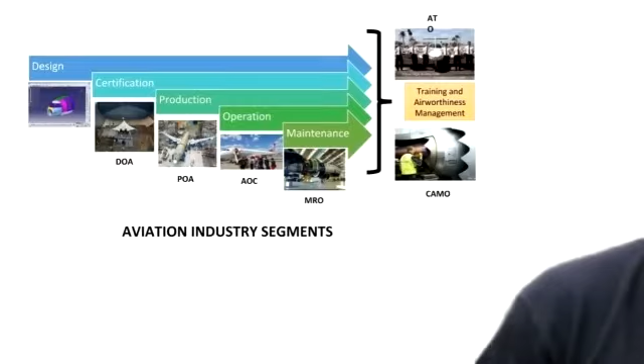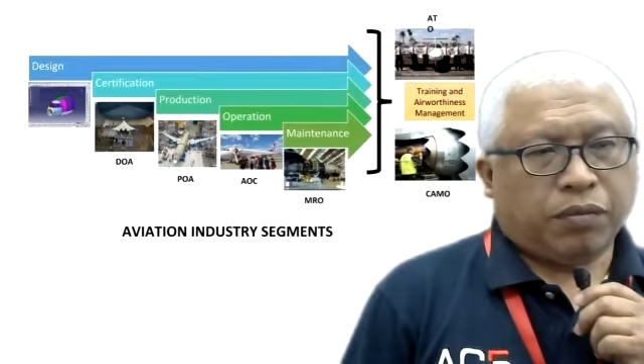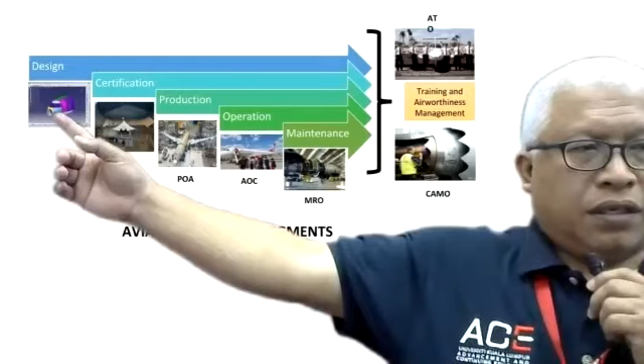Today I will talk about the aviation industry segment. What is the whole ecosystem of the aviation industry or aerospace industry? You can look from here, we begin from design certification, design certification of the aircraft component.

Those are the initial segment of the industry, which is design and certification. Some companies just do the design, they're not doing the certification. They may be doing just an initial product, or a once-off product. For example, Burt Rutan have designed and manufactured several aircraft, but they are not certified because those are special mission or experimental aircraft. So they're just doing the design.

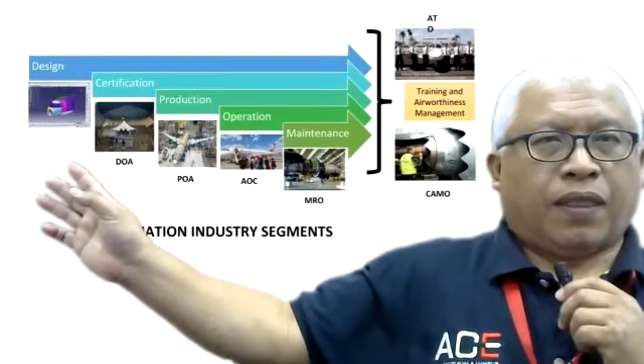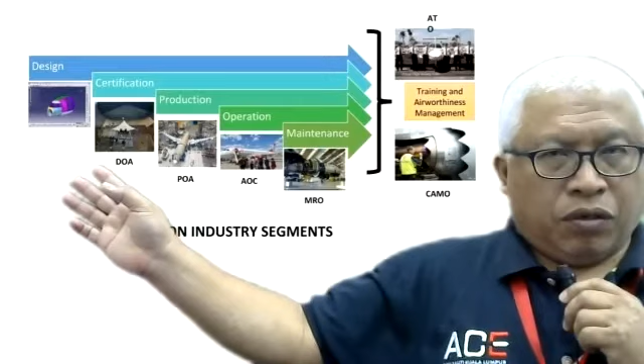Then if you have the design, you certify the design, for you to be able to get the type certificate. For the aircraft to be awarded with type certificate, they have to go for certification. In certification, the aircraft must comply with all the certification basis, which was agreed with the Civil Aviation Authority, the authority issuing the type certificate.

Why do we need the type certificate? Because the type certificate is a prerequisite for the certificate of airworthiness. For commercial hire and reward flight, the aircraft should have a valid certificate of airworthiness. Without that, the aircraft will not get the certificate of airworthiness. The best they may get is an experimental certificate, which is not for commercial or hire and reward.

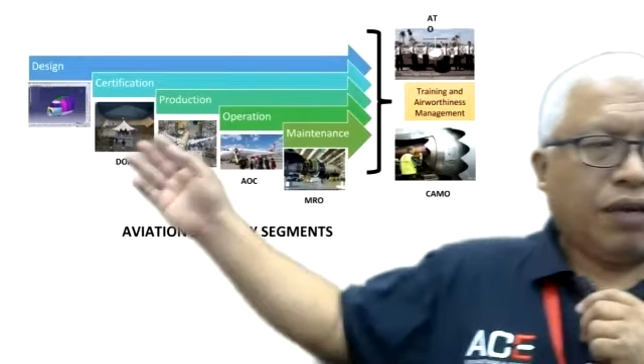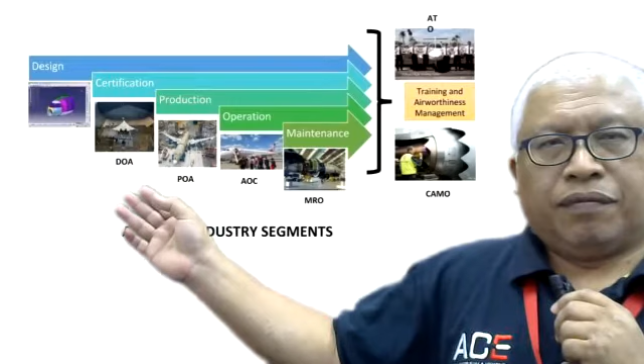Once you have the type certificate, you go for production. This means you have a certified product, and you already have the type design data, which is transferred to the production organization. They will make parts, components, and assemble the aircraft, engine, or propeller as one complete assembly. Once completed, you have a complete product.

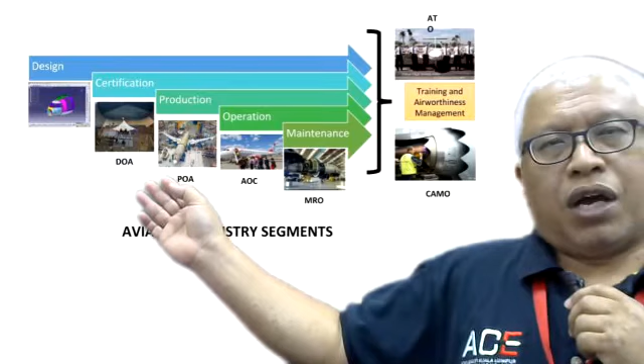There will be a customer, so an airline operator will buy the aircraft, and it will go for operation. Primarily in the aviation industry, the operation is flying the aircraft, which is the airline. However, for you to be able to fly the aircraft, there are many other segments, other sectors.

You need to have airports or aerodromes, so there is aerodrome services, the aerodrome company. Then you have an organization to manage the navigation and traffic, so we have air traffic services. And we have an organization to do the ground handling, so those are ground handlers.

Those are basically the main industry in the operation, which is the aircraft operator airline. That's why we put AOC, Air Operator Certificate. Companies with the AOC can fly scheduled flights to carry passengers and cargo.

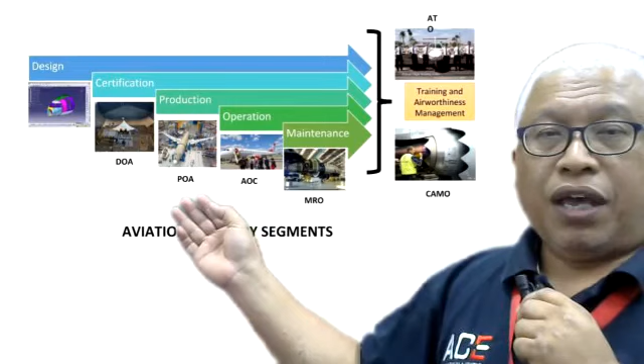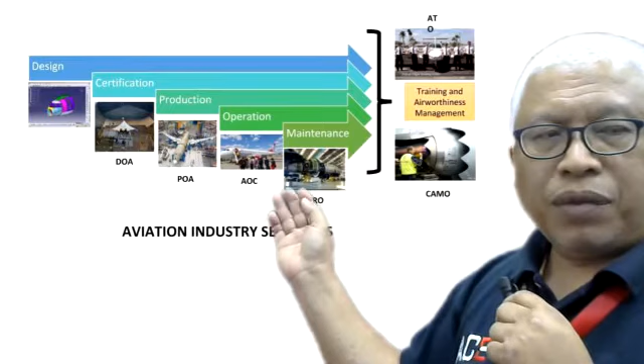However, for them to fly the aircraft, they have to have other support. They have to have the airport, the ATC traffic controller, and ground handling services. So in order to keep the aircraft flying, you have to maintain the aircraft according to the maintenance program. You have to have a company to do the maintenance, a maintenance repair organization to carry out the maintenance program as developed and certified by CAMO, Continuing Airworthiness Management Organization.

This company, the Continuing Airworthiness Management Organization, will prepare the maintenance schedule and maintenance program for individual aircraft. Then they will go to the MRO to get the maintenance done according to the maintenance program. And if they have any problem in terms of repair, such as a defect repair or they need modification, they will go back to the DOA.

The DOA will do the design data. Design data comes back to the MRO, and the MRO will embody it. So those are the work of CAMO to ensure the aircraft is airworthy. They manage all the aircraft maintenance program, all checks, any AD outstanding, any SB mandatory required to be embodied on the aircraft, managed by the CAMO.

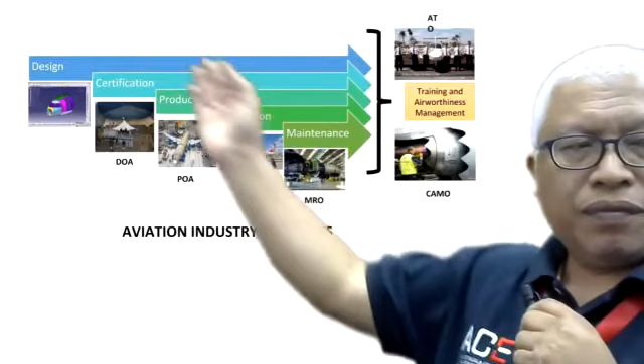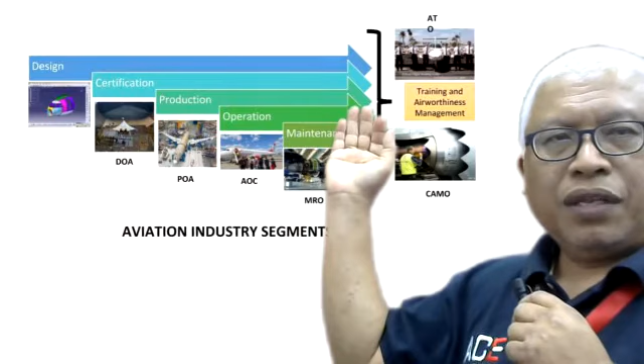Overall, everything should have a competent person. So people working in this segment of industry must be competent, provided by a training organization. This training organization will provide the training, provide the skill and knowledge, and some companies provide experience through attachment, so that the aviation industry will have competent persons to work in the industry, for the industry to be safe.